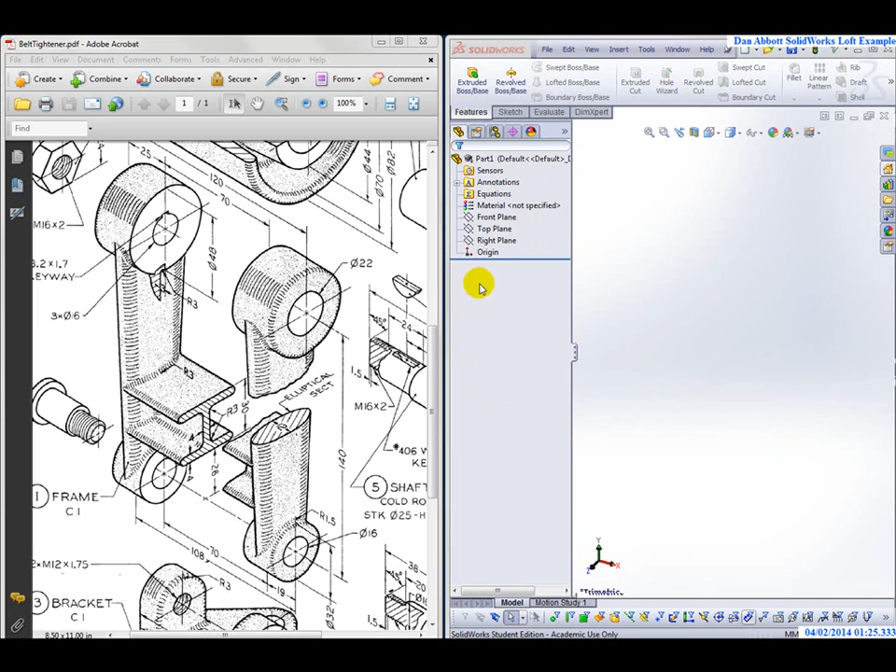First, what I'd like to do is to create a plane that I can use to draw that one side piece on. So in the Features tab, I'm going to go over to, let's stretch this out, Reference Geometry. And under Reference Geometry, I'm going to select Reference Plane.

My first reference is going to be the right side view, the right plane. And what I want to do is to take a plane that is half of the distance between those two faces, 35 millimeters over. So I'm just going to pick right plane, and down in the distance I'm going to type 35. So I'm creating a plane that I can draw that surface on right here.

Now that the plane exists, I can go ahead and sketch on it. I go to my sketch tool, pick sketch, turns it around because that's the plane that I want. I'm going to start by putting a center line.

The center line starts at the center, then goes up some distance. Now the distance between the centers is 140, so I'm going to put a dimension of 140 on that center line. And just because I like the plane to look a little more like what it should look like, I'm going to stretch it out so it looks like that.

Now I'm going to draw a circle here at the end of the center line up there, and I'm going to draw another circle down here at the end of this center line. I'll put a dimension on this, and that dimension will be 48.

I'll put a dimension on the bottom one. That dimension is going to be 32. And that's all I need for right now.

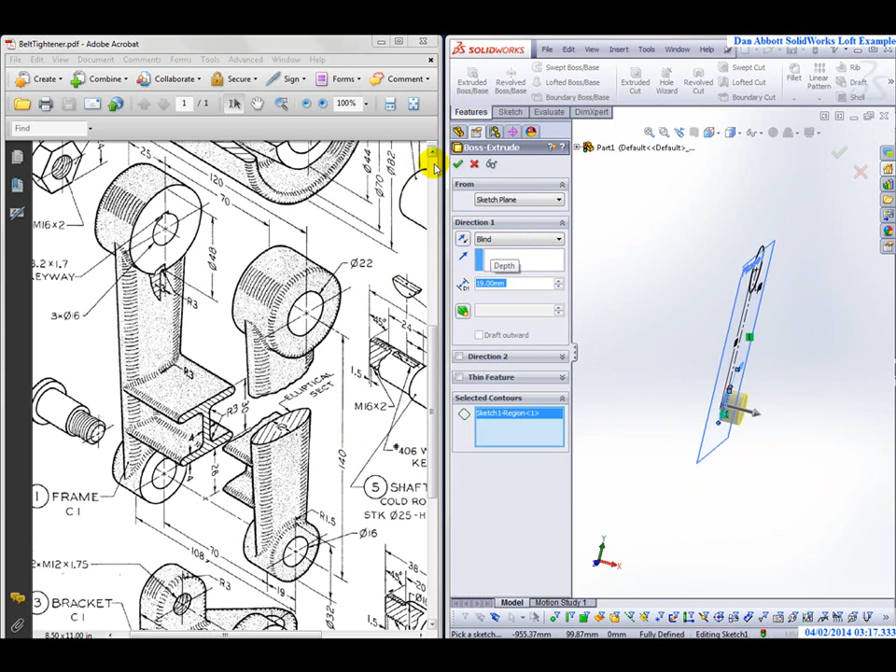And I'll extrude that, its thickness, which is 19. Put that right here. Come back out. I've got that one boss.

Now I'm going to go back and do another extrude. This time, instead of picking a plane and sketching, I'm going to go and pick the sketch that I just created. I'm going to open up the feature tree, open up that first boss, pick that sketch plane, go down to Selected Contours. Once again, in the Selected Contours, I'm going to pick just that contour.

This one comes out 25. I'll come out that distance right here. And now I've got the top boss and the bottom boss, and I just need to connect them.

I'm going to look at this from the bottom. Looking at it from the bottom, it gives me a place that I can sketch the ellipse that I need for the bottom loft. I'm going to actually create 2 ellipses here.

So now I'm going to go and sketch, this time on the top plane. Top plane is the one right down through here. So if I look at the top plane, you can see that it's right where that lower boss is. And the reason I'm looking at it from the bottom is just so that I can see it.

I'm going to go ahead and draw a center line. I'm going to draw the center line so it starts at that edge right there and just goes straight down vertically until it connects this edge right here.

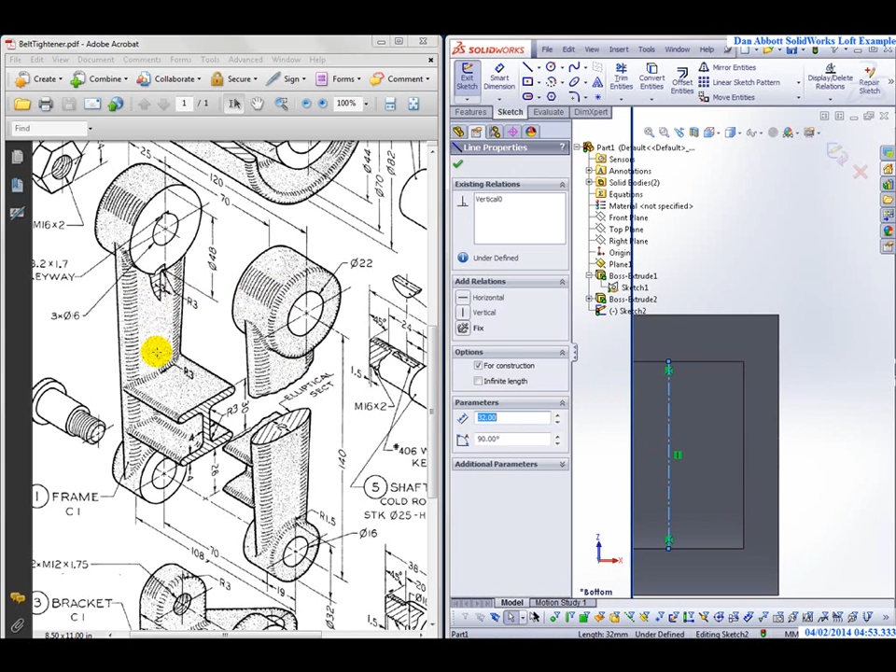There we go, vertically—that's a vertical line, and it touches the top and touches the bottom. Now it's free to go side to side. If I look over here, I see that the surface of that lofted piece is 3 millimeters from the face.

The center of the lofted piece is half of 12, which is 6. I'm going to put a dimension from this outside edge of this boss to that center line of 9 millimeters, because that's where I want my ellipse to go.

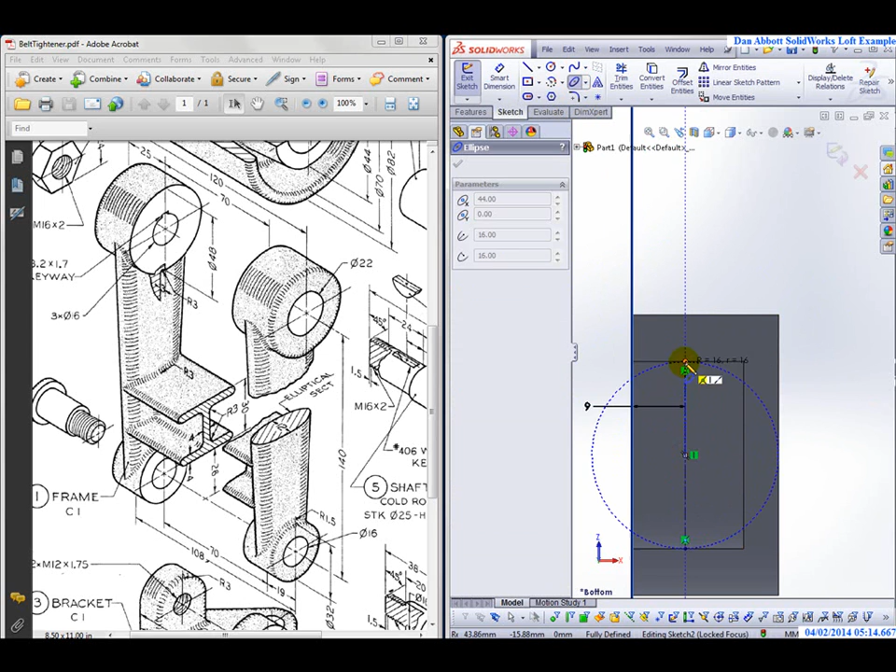Now I'll go to the ellipse command. I want the ellipse to touch on the bottom. The ellipse has a center, so I'm going to go to the center of my center line, snap up here,

then just draw the ellipse like so. Now that constrains the ellipse up and down, so if I put a dimension on the ellipse of 12, that should fully define it, and it does. I'm actually done with that, I'm just going to press enter.

Now I'm going to go and look at this from the top, so that I can look down through this part. And now I need to add another sketch. I do need a plane to sketch on—well, I don't need one, but it's easier to do on a plane.

So I'm going to go to Features, back over to Reference Geometry, and create another plane. This time my reference plane will be the top plane, the one down where that goes through that lower boss. And the distance between them is going to be 140.

So now that plane goes directly through the center of that. Although I could also have said my second reference is going to be the center of that plane. I'm going to go with the center because I need to turn the sketch back on.

I can turn the sketch back on. Let's go ahead and turn that sketch on. I go right up here, I'm going to say let's show that sketch. So now I can see that sketch.

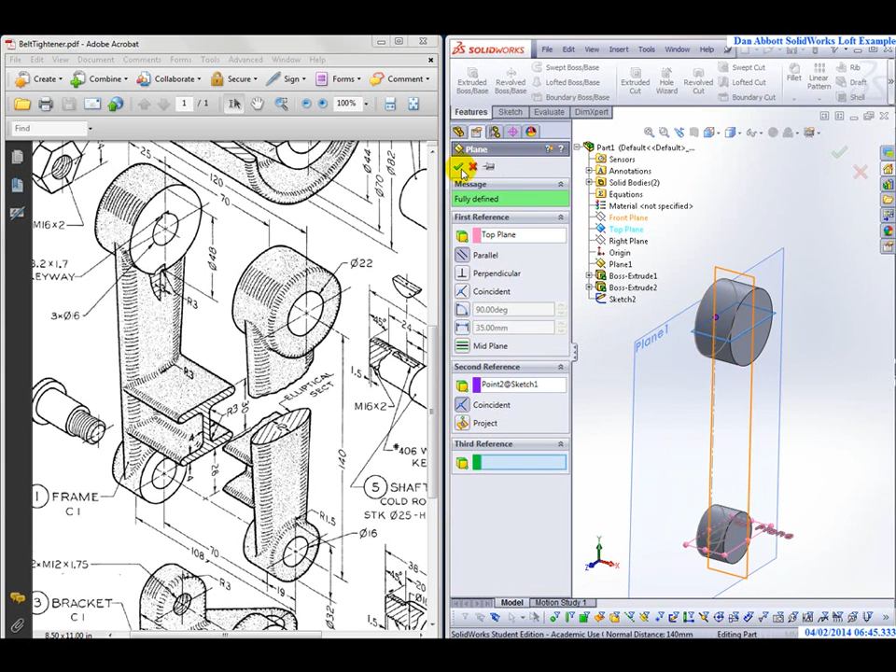Now we'll go back over. I'll say I want to have a reference geometry plane. I'm going to base it on the top plane, and then my second point is going to say to go through the center. That way I don't have to type in the 140, and if that distance changes, it'll automatically change the location of that plane. It's a better way to do that—it maintains the overall intent of the design.

So now I'll look down at this from the top, and I need to draw another sketch. That sketch is going to be on the plane that I just created, which is right there. I'll draw a center line again.

This center line is going to start up here, go all the way down to here, and it's going to be vertical. But what I want is for that center line to be lined right up with the one below it. So I'll pick the center line below it, hold the control key down, pick the center line I just drew, and select collinear so that they line right up.

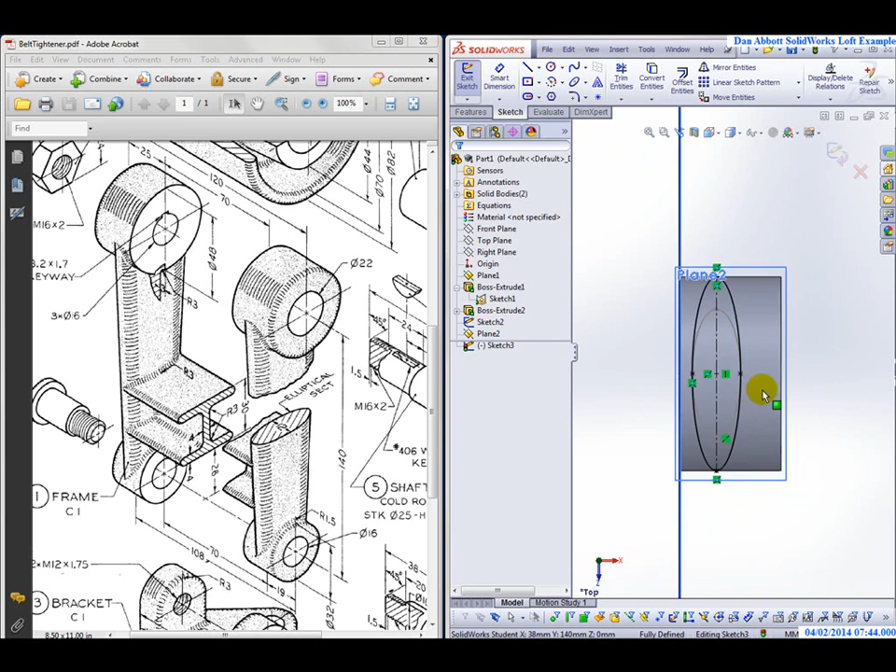Now I have something that I can use to draw my ellipse. I'll draw the ellipse from the midpoint of that center line up to here, and I'm going to snap right to that location. Now it didn't actually snap yet, so I'm going to drop it back on there. Now that's fully defined, and it's defined by the geometry itself.

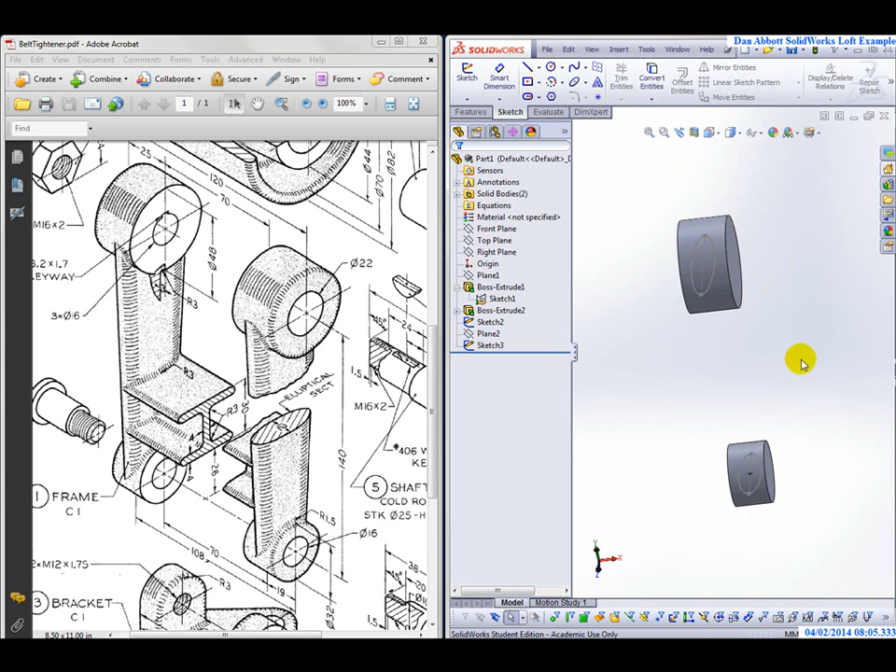Come back out again. So what I have here is two ellipses, the one on the bottom and the one on the top. Just to make it a little easier to see what I'm doing, I'm going to go back to that original sketch and hide it. I'm going to take that plane right there and hide it, and take that little plane that I created for the top ellipse and hide that. So now I'm just looking at my two elliptical sketches, which are listed over here as Sketch 2 and Sketch 3.

So now I'm going to go to Features. Notice I'm not in a sketch anymore. Those two sketches are independent of each other except that they've been snapped together, but they're in two separate sketches. Now I'm going to do a lofted boss and base.

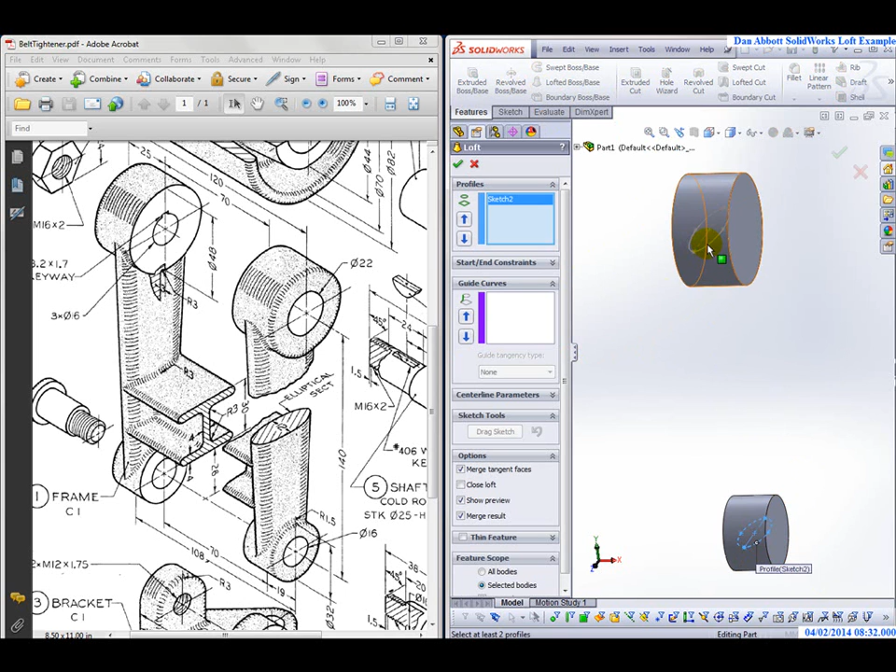I'm going to pick the bottom ellipse, and I'm going to pick the top ellipse in more or less the same position so that it does that. If you're not careful, you can have that come up and twist. So now that loft is put in place, and I've got the one arm on that side that I need.

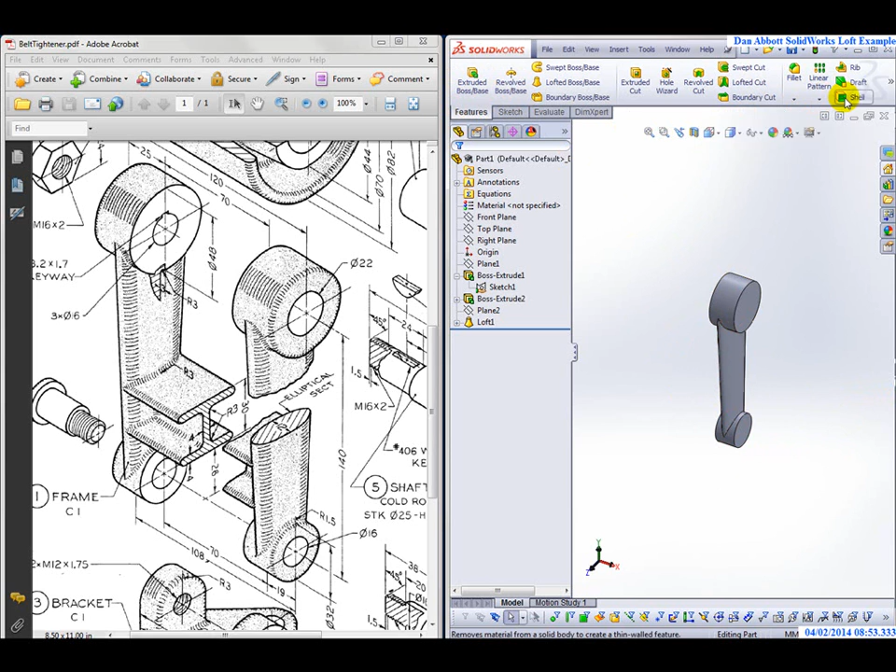Holes are pretty easy, so instead of going through that process, what I'm going to do now is just mirror this on the other side. Now mirroring that is a feature function, so we're going to go over to the mirror function, which is right there. And the face—or the plane—I'm going to mirror around is the right plane, because that's down the center of the part.

And it's down the center of the part because I offset my original plane 35 over. Now, as far as features to mirror go, I can't pick these individual features because they would be an unconnected part. So what I need to do is go open up Bodies to Mirror, and I'm going to pick this whole body to mirror it over. But it's still not going to work.

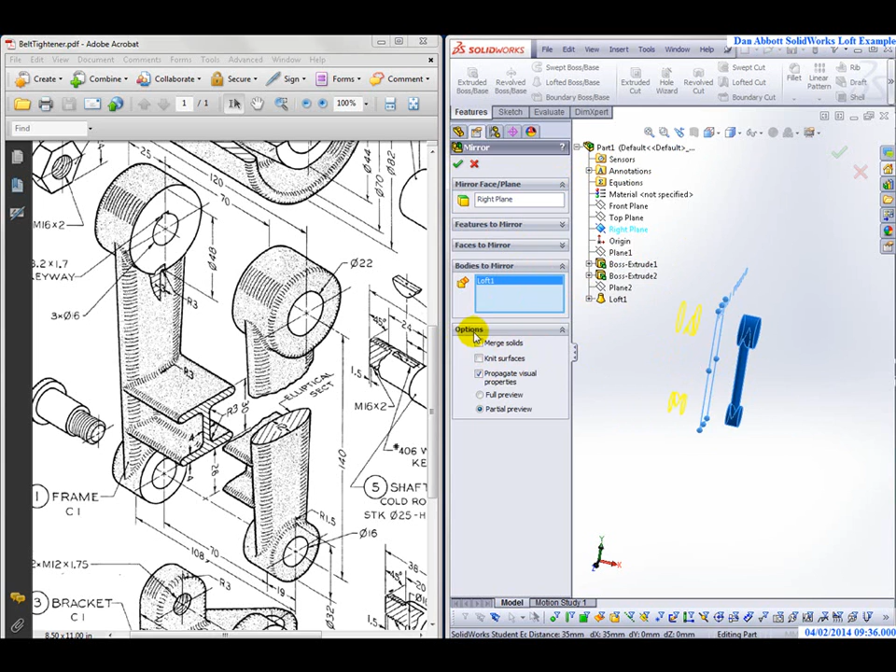If I pick the green check, it says you can't merge the newly generated body with the workpiece. The problem is, since they don't touch, there's no way you can merge them together. If I go over and clear Merge Solids right there, try it once again, now I've got the two pieces.

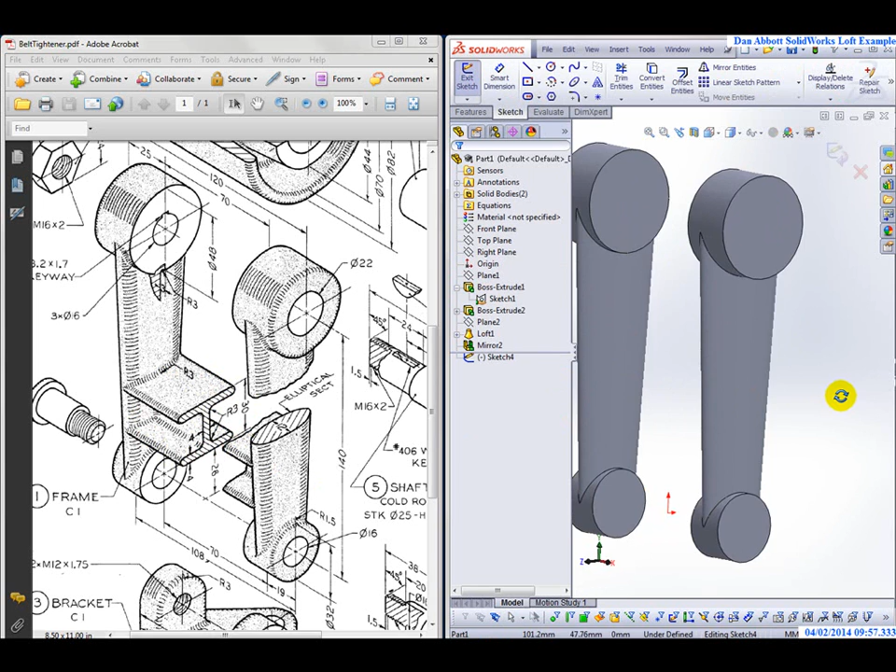Now what I'm going to do is go over and take a look at it from the right. And what I want to do right now is to do another sketch. This sketch is going to be on the right plane. And what I'm going to do is to sketch that I-beam shape that goes between them. That's this shape right over here. And I'm doing it on the plane that's halfway between them, but from the right hand side, just so I can see what I'm doing.

So I'm going to go up. This is actually kind of helpful here if I start by putting in a center line. I'm going to start my center line on that center right there, and I'll go all the way down to here just to have some place to put it. So snap to that point, snap to this point. Now I've got something that I know is always going to be centered between those two center lines.

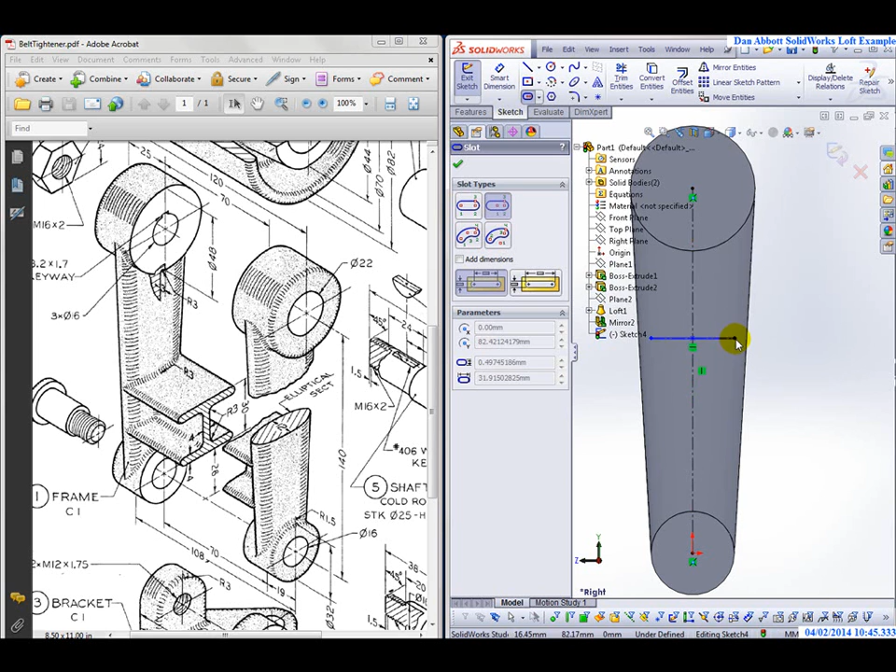So now a couple ways I could do this. I could draw a circle. Let's do a slot. I'm going to draw the slot on here, and it's going to be the center slot tool. So if I pick a point here and make that vertical, then come down like that. Now what I can do is put a dimension on it, and the dimension of the width of this should be 4. So I'll make that 4.

And now what I want to do is connect that edge right there with this silhouetted edge over here. So to do that, I'm going to hold down my control key. I'm going to select that arc. Then I'm going to move over, and I can't just grab the loft. I'm going to move that until I see that symbol that shows a yellow box with an edge, and that's called a silhouette edge. Now when I pick that, I've got a silhouetted edge, which is really not an actual edge, it's just the silhouette looking past it at an arc, and I can say, let's make those tangent. I'm not going to bother to do the other side, because what I'm really using this for is just to create the shape, and then I'm going to trim it up.

Now I'll do another slot, do that down here, make sure that it's vertical, put another dimension on this side. I'm going to do everything on the left side and then mirror it over. So that's going to be 4 as well. Now I'm going to do the same thing. Hold the control key down, select that edge, come over here until I get that little silhouette box, add a tangency relationship there. Now that's always going to be tangent to that edge, so even if it moves up and down, it's still going to be tangent.

And now I will offset that line right here 2 millimeters, so it comes over like that. It creates an actual line, and now I'll do a little bit of trimming. Get rid of that part of the line, that part of the line, this part, this part. Also going to get rid of that, and it's going to destroy my slot, which I knew it would. And I'm going to get rid of that as well. Trim this out. I will trim that part out. Oops, I didn't mean to do that. Let's back off of that. I'll just Control Z. Back in the trim command now.

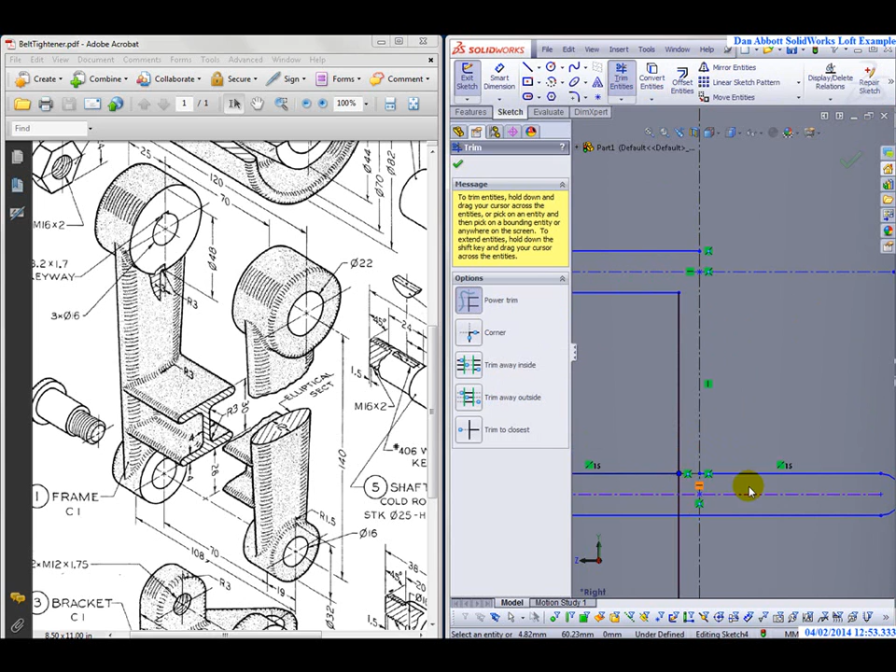So I want to get rid of this. Yes, that's going to destroy that one. And I'll get rid of that part as well. And this. And that. Leave that piece in. Okay, now a little more trimming. Got to get rid of that. And I've got to get rid of this. And I have to get rid of that. So all I'm doing here is to create a shape. I did lose one of my dimensions, but just to create a shape that I can mirror over. And put my smart dimension back here, bring that across like that.

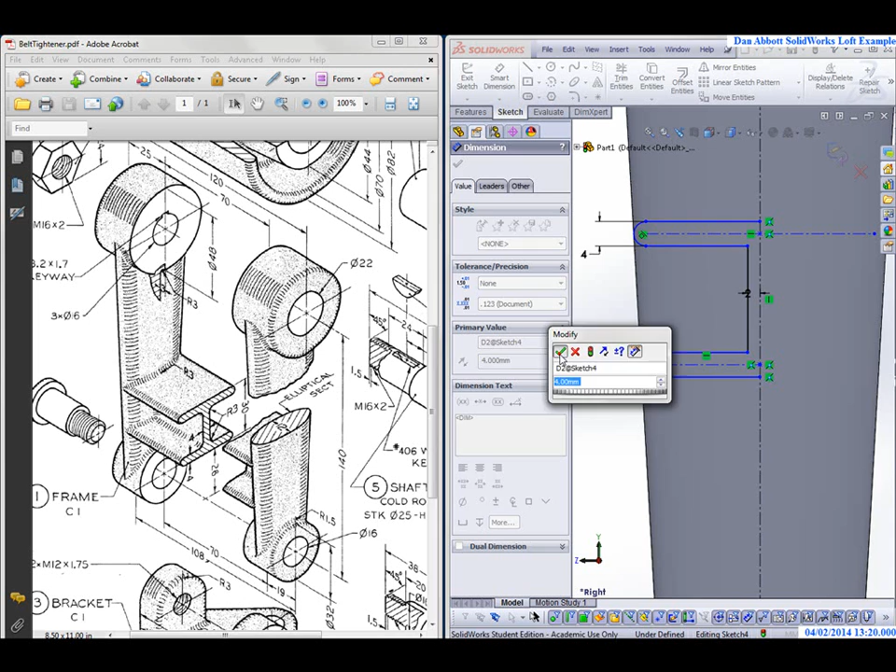Now I have a small problem I just realized, which is that this is not a tangent relation yet. So I'm going to hold my control key down, pick that point, that line and that edge, make those tangent. I'm going to do the same with this and the arc, make those tangent. Do the same thing down here, hold the control key down, make those tangent, hold the control key down and make those tangent. Now I lost those tangencies when I trimmed my slot, so it might not have been the best way to do it, but it's going to work out.

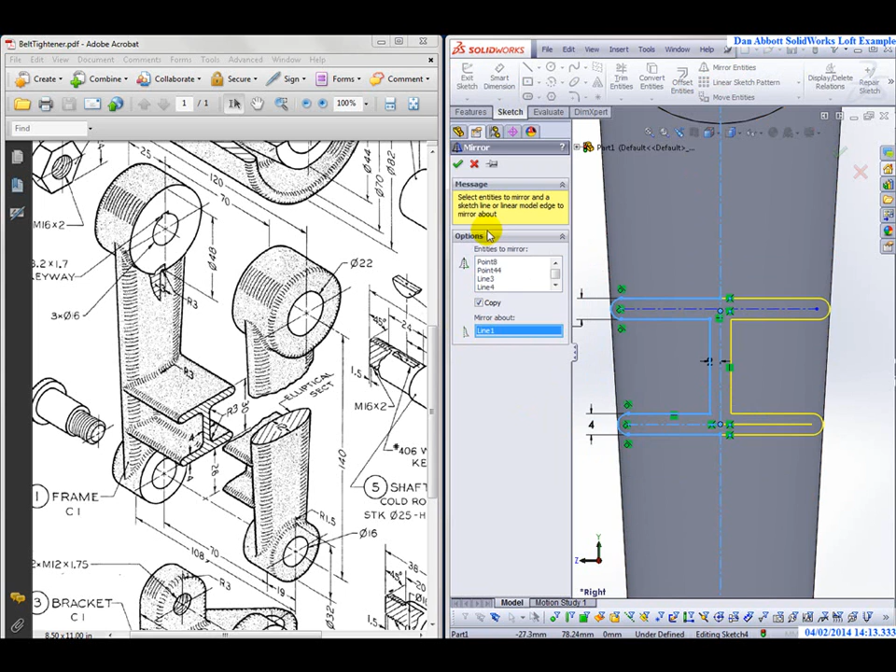So now I'll go to Mirror Entities. I'll say take all those entities right there, mirror them about the center line that I put in here, comes across like that. One more time. Do that, mirror it about the center line right here, pick the green check. Now that is no longer necessary, and that is no longer necessary.

Yeah. So now you can see I can take this and move it up and down, and it stays tangent to the outside edge. I can move this up and down, it stays tangent. Can't move anything back and forth, so now it's just a question of locating it.

So I'll put a smart dimension that goes from the center line to here. That distance is 26, looking at the print. And then the overall distance from the top of this to the top of that is 30 millimeters. We'll put that in. Now it still says underdefined, and when that happens it's usually because you created something, in this case I did, that left behind the little point right there that's blue.

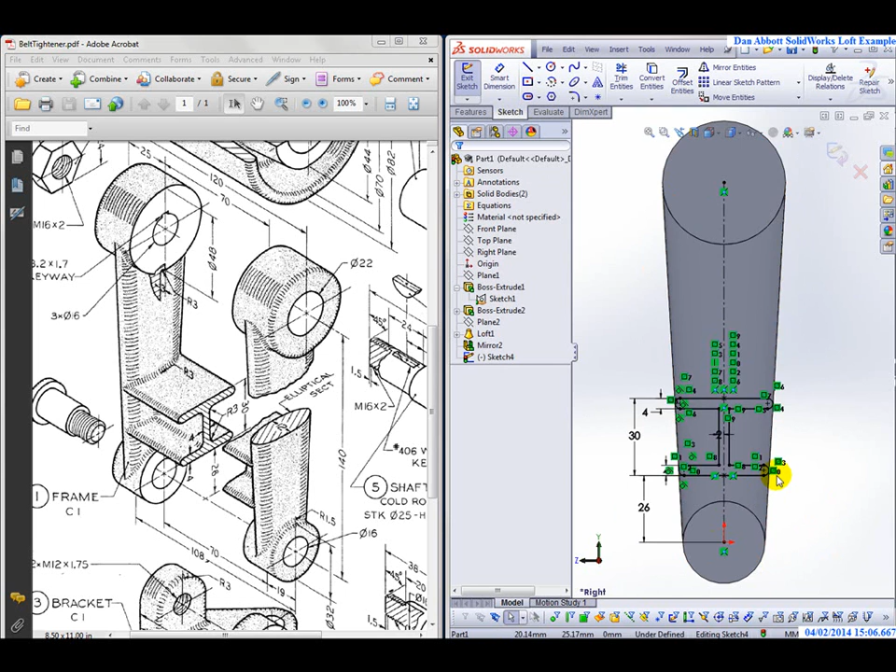I'm going to delete that and then start looking around for some other things that are underdefined, because it still is saying underdefined. Oh, there's another one right here, that little blue dot right there, which was created by the slot command. Slot command looked like a good idea when I started this. It might not have been the fastest way to do it, but now it's done and it is fully defined.

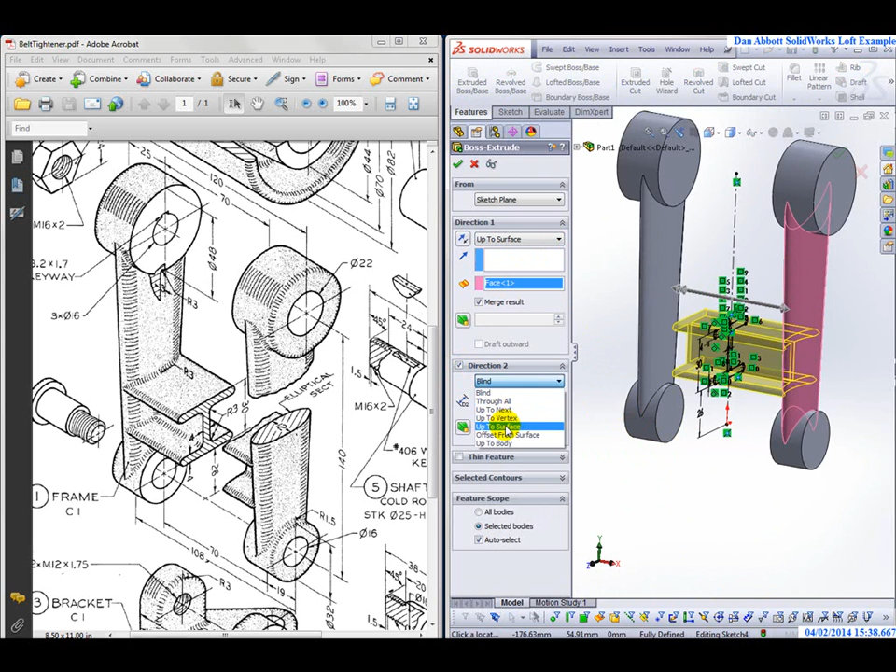So I come back over to features. I'm going to do an extruded boss, swing it around so you can see what it's doing here. I don't want to go blind. I want to go up to surface, and when I do, I'm going to pick that surface right there. Then I'm going to select direction 2, do the same thing, up to surface, but go in the other direction. Green checkbox, and it comes in and looks like that.

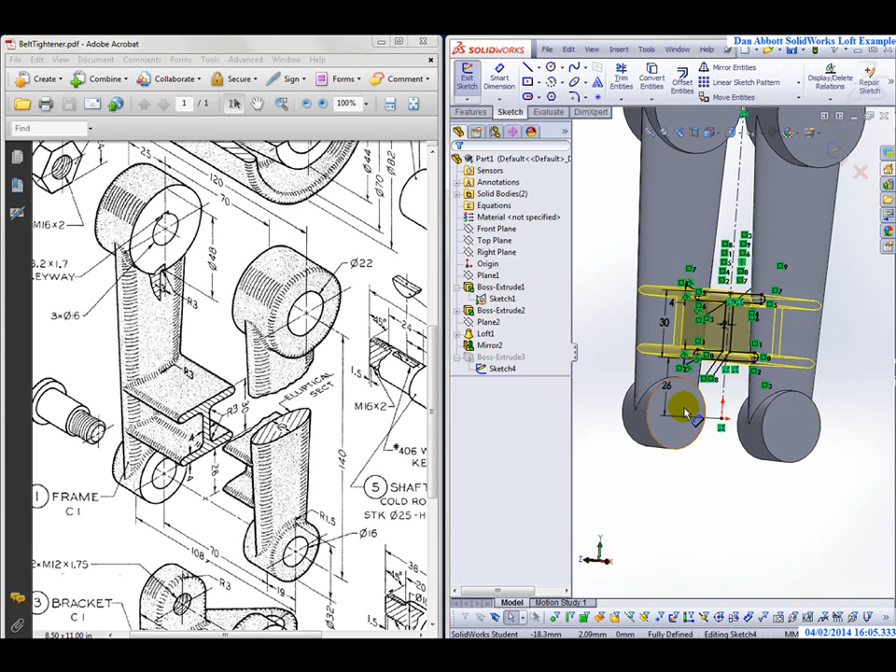The rest of this is pretty straightforward, just putting some holes in and a little bit of shape, but I'll show you what the purpose of this was, is to be able to go in and make a change to the dimension and have this part behave in the way that we expect it to behave. So that if I go down to this boss, right click on that sketch and edit it, and come in and say, I want to raise that up from 26 to 40, it should slide the whole thing into place.

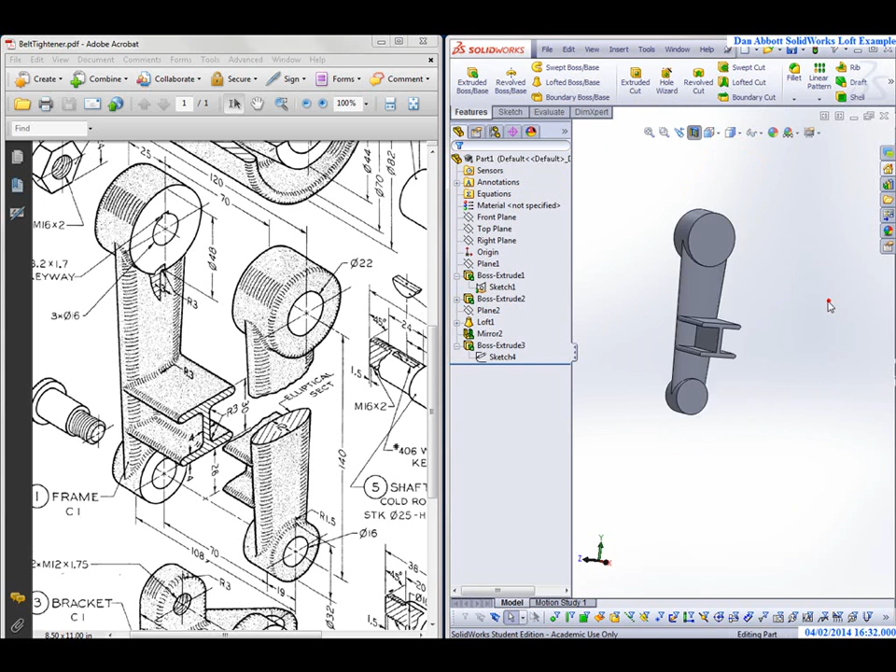And when we select that green check and then come back out of the sketch, we shouldn't get any errors, and when it slides up, it should expand to stay tangent to the outside edges of those silhouettes. You can see that's exactly what happened. We would have cut this in half this way, then take a look at it from the right hand side. That part is always going to be tangent as it goes up and down on here. Clear this out.

Likewise, if we go back to our original sketch, we make a change so that 140 is now 120, it should shorten up without any problem. And likewise, if we go back to that sketch and decide that this 48 needs to be 42, and maybe that 32 needs to be 34, that should still continue on without breaking, and you see that it does, and all the parts stay connected in the way that we want them to be connected.

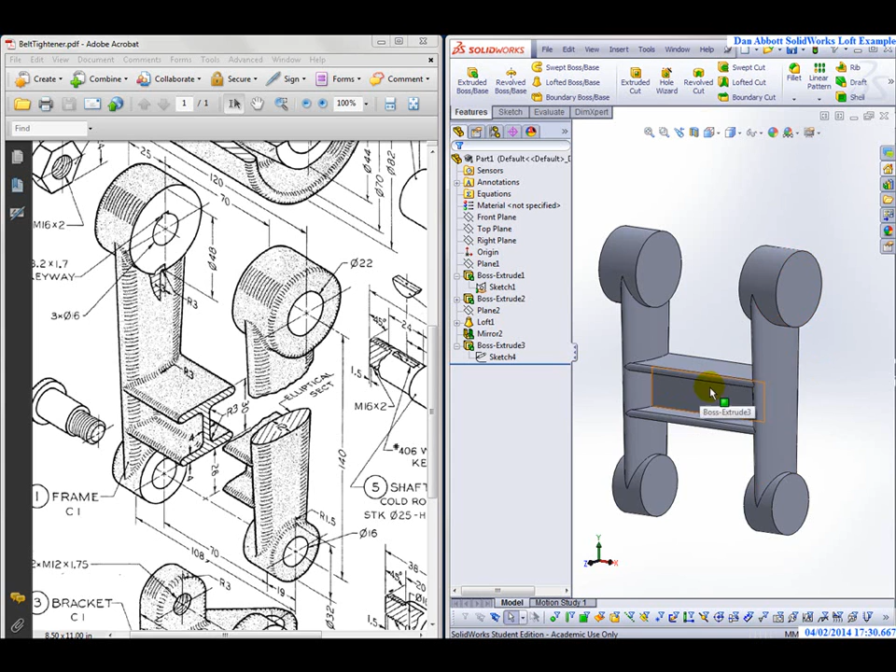I'm going to wrap that one up, but that's just an approach to how to do really two things: to create a loft, which requires that you have two shapes and loft between them, but also so that you build into any part you're making your design intent. And SolidWorks uses the phrase design intent all the time, but clearly my intent here is to make sure that that little I-beam bridge always connects in exactly the way that it's shown here, whether we make it higher, lower, move it, or change the thickness or anything else.

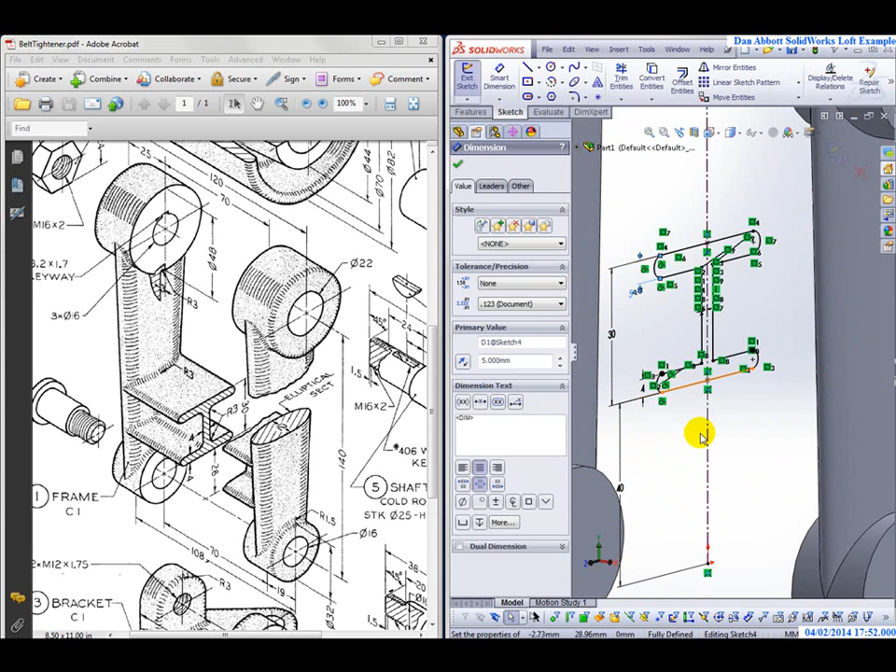So I literally should be able to go and change any of these parameters and say, I don't really want that to be 4 millimeters anymore. I want that top to be 5 millimeters, say. I should be able to make that 5 millimeters, make the bottom one 5 millimeters as well, come back out, and still have an I-beam that connects the parts, just like that.

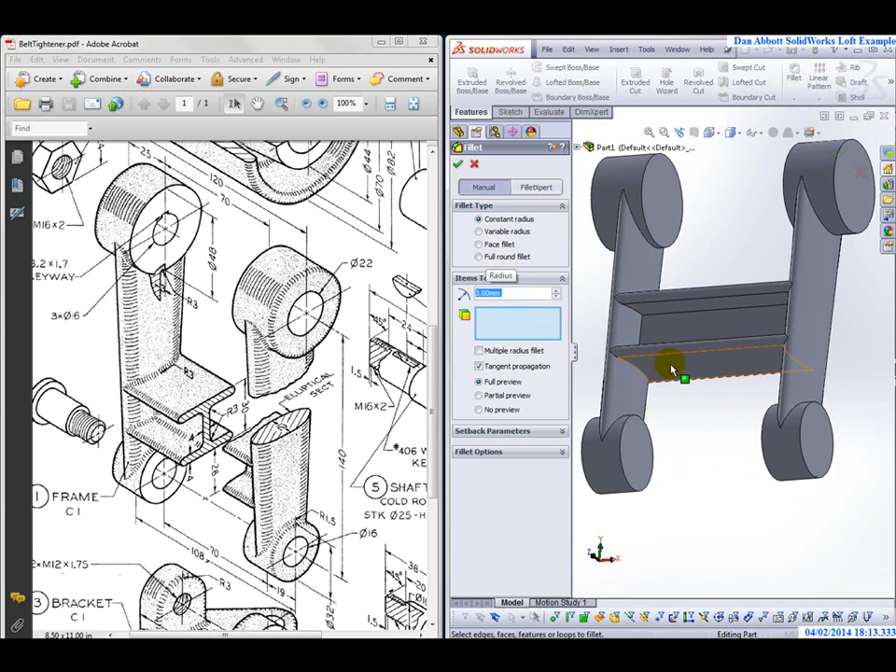You know what, as long as we're right here, what do we have, 18 minutes? Let's put the fillet in there. This one could be a little tricky. That fillet is a fillet of 3 millimeters, and I'm going to try picking surfaces to put that in. I pick that surface, and it's waiting, and I think it's going to come in just a second, and it does. We're going to roll it up here, and I'll take this surface. That one comes in as well.

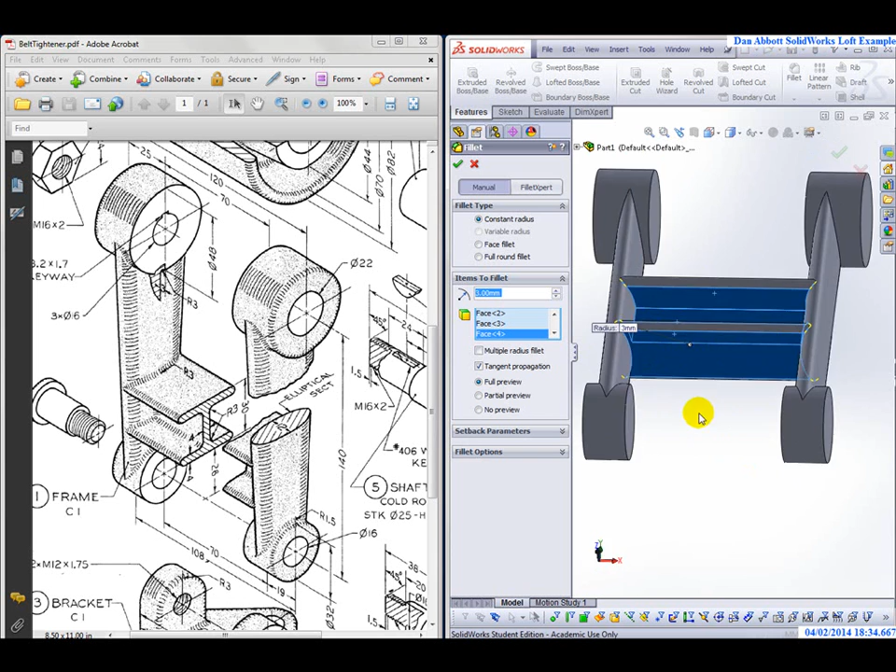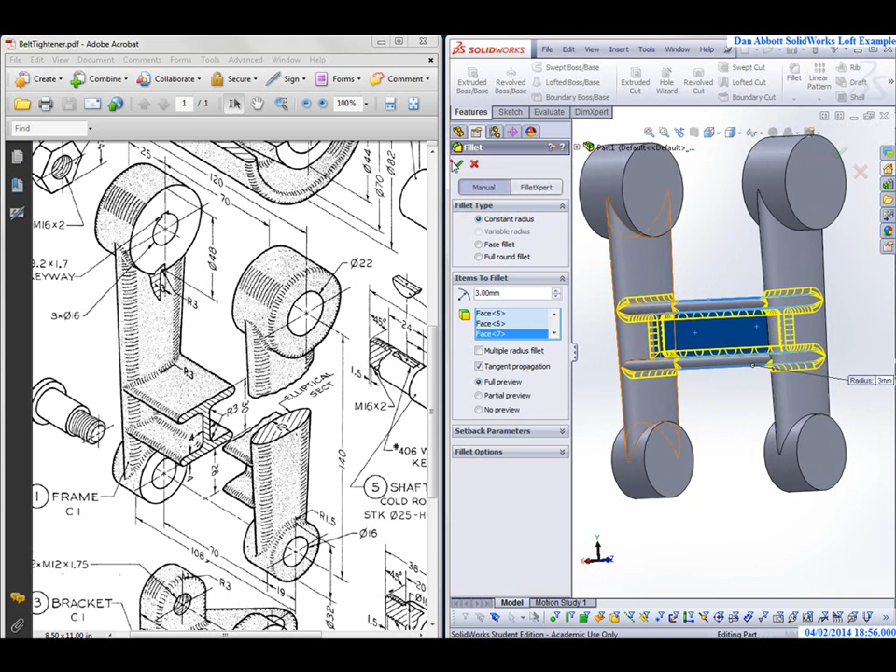I'm going to pick all these surfaces, including the one up under here. Take the top surface, roll it around to the other side, take that surface right there, and don't quite have everything. Pick that surface right here, and when we look around, it looks like it got the whole thing. Yeah, so pick the green checkbox, and you can see you've got a fillet that goes all the way around in one pass, by the way.